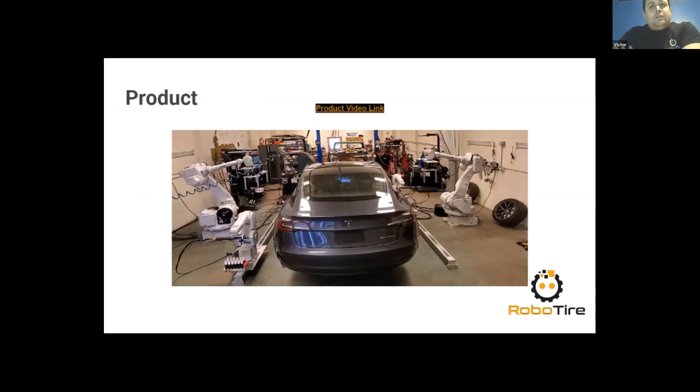So jump right into it. This is a video of our robots in action at our garage. You can mute it, you don't have to hear the full marketing sound.

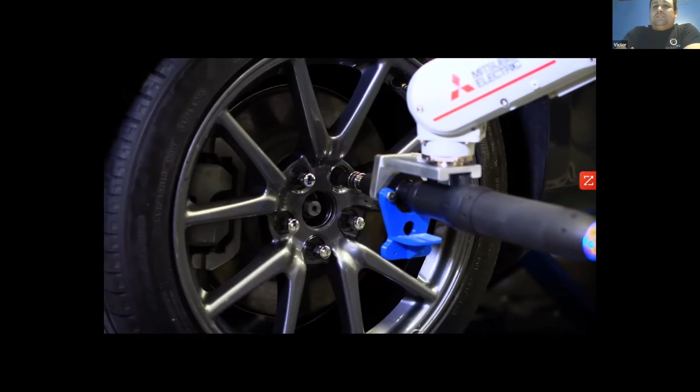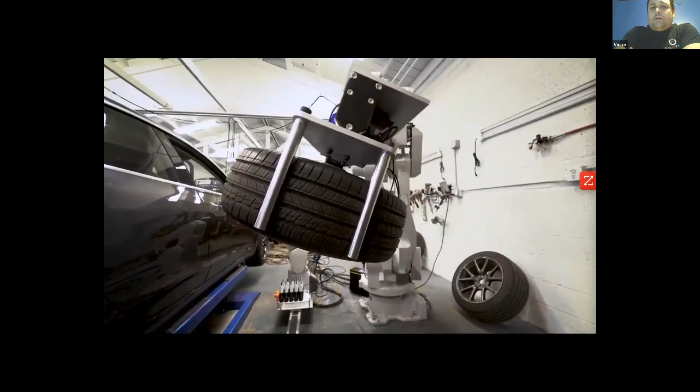So that's why we brought out this RoboTire system. What you'll see here is a completely automated bay. We have our own automated lift that will pick up the car.

We have 2 little robots that are responsible for removing lug nuts. We use computer vision to identify and detect where the lug nuts are. We're monitoring torque, breakaway, and run-up torque to detect cross-threading, prevent cross-threading, and prevent seized lug nuts, et cetera.

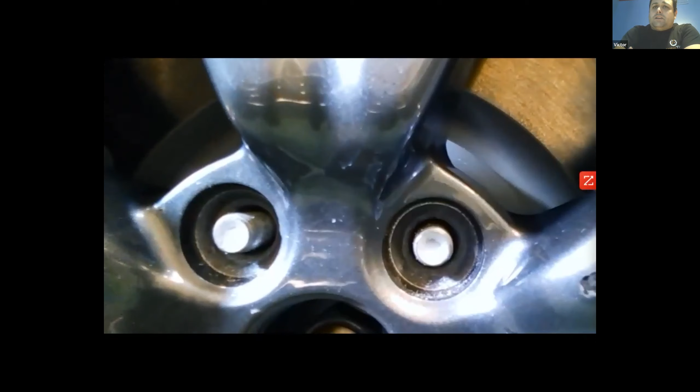And then our larger robots come in, and again, with computer vision, detect where that wheel is, ensure we get no stud damage, and it comes off.

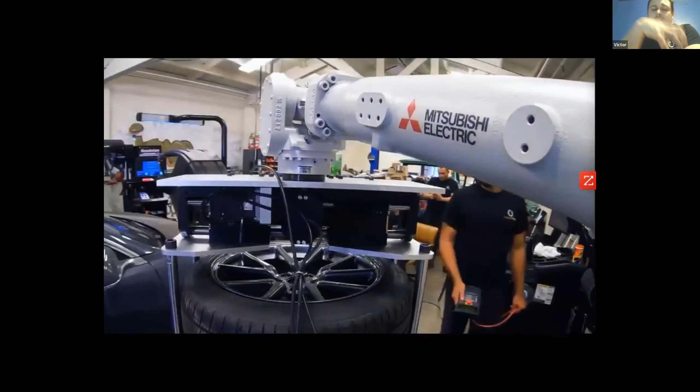And then in the next video you'll see in a second is our integration with Hunter Engineering. The tire changer actually demounts the tire and balances it. And then we bring it back on and put it back on the vehicle.

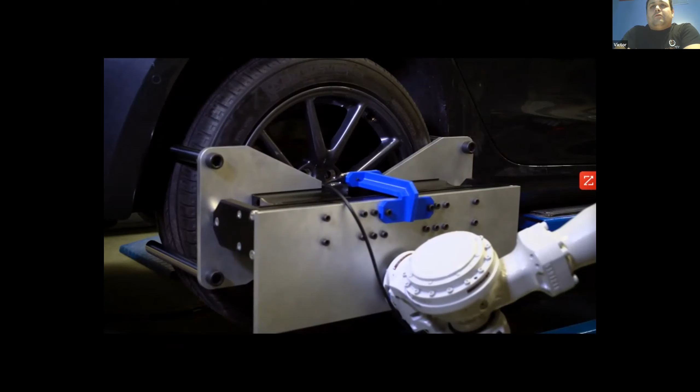All of these robots are unique from an automation perspective because they're all cloud computing. They're not single siloed, we pull from predetermined databases. We all pull from vehicle OEM information, so that's how we get torque values, wheelbase, stud lengths, et cetera.

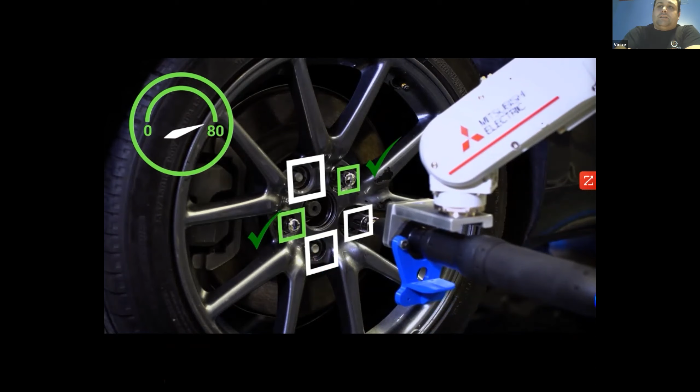And this should be wrapping up in a second, and we'll jump into the next video. So this video is really interesting because Hunter is the biggest player in this space. And what we do is we have an industry first where our robots actually control their systems.

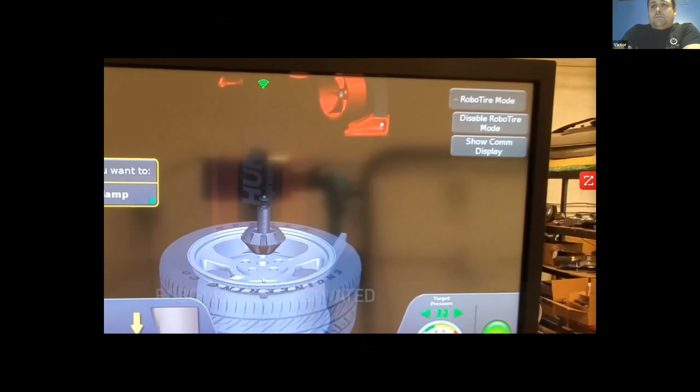So for people who are familiar with Hunter, what you'll see is that our robots have an open API. We can actually work with any tire changer and balancer, but you'll see here where we go into our own RoboTire mode, and it's completely autonomous now, lowering spindle, putting new tire on, new tire prep, et cetera.

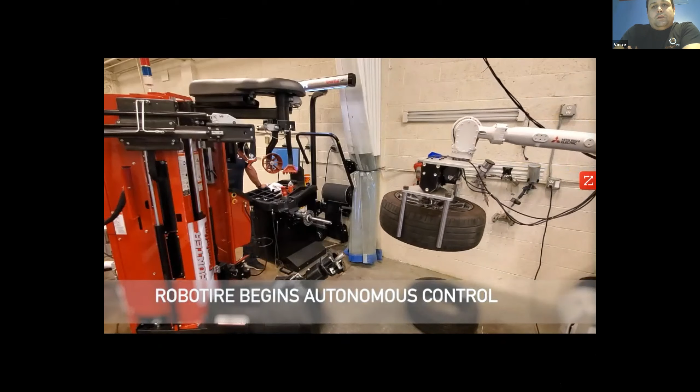So you see here, we dropped the spindle. This is some of our earlier versions where we did have a little bit of human operation. The human is still used for deflating and inflating.

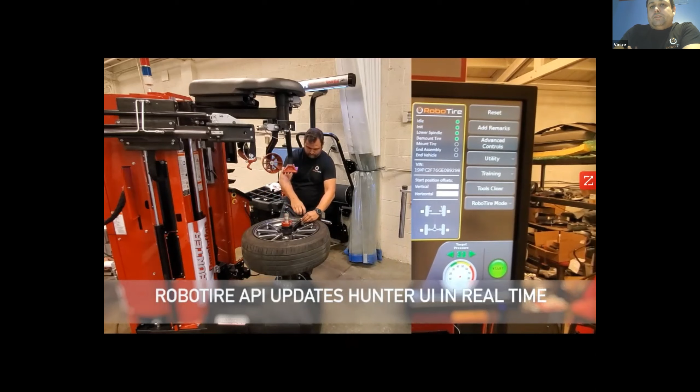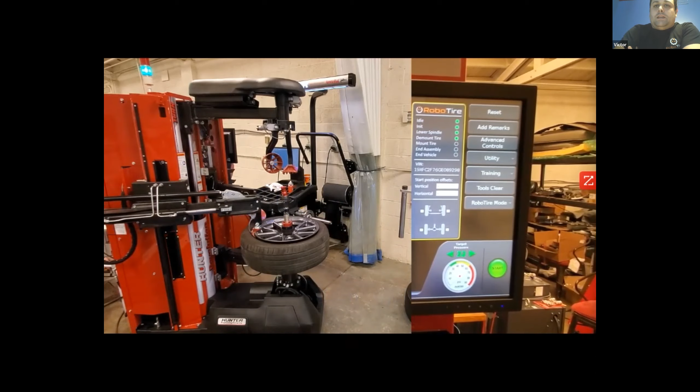I can go into the tire process later, but to not bore you, I won't jump into it fully. And again, these systems are completely autonomous.

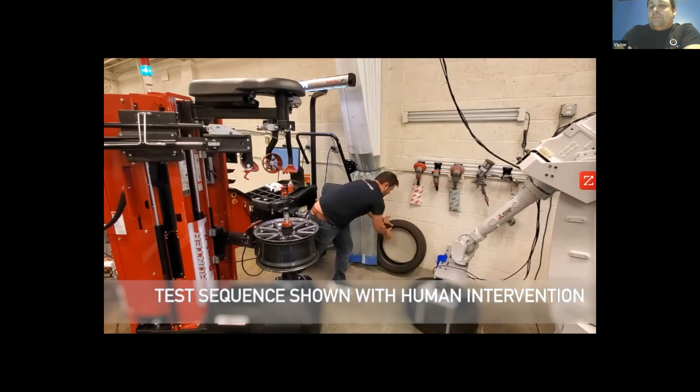While this goes, I always like to ask - and no one's going to respond right now - what everyone thinks the tire market is. Most people are off by a factor of 10. It's $40 billion that we spend on new tires alone each year.

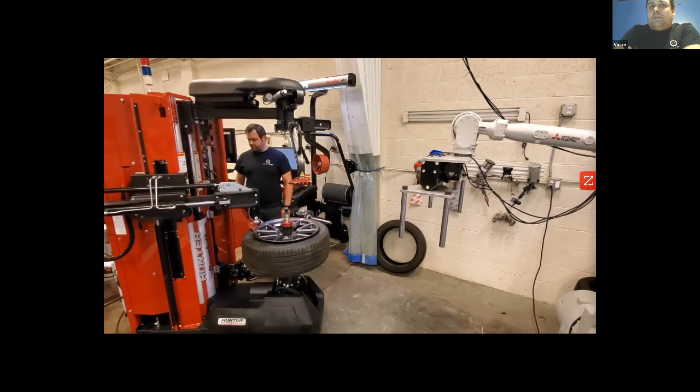And that market is getting better. I'll address why it's getting better in a few seconds.

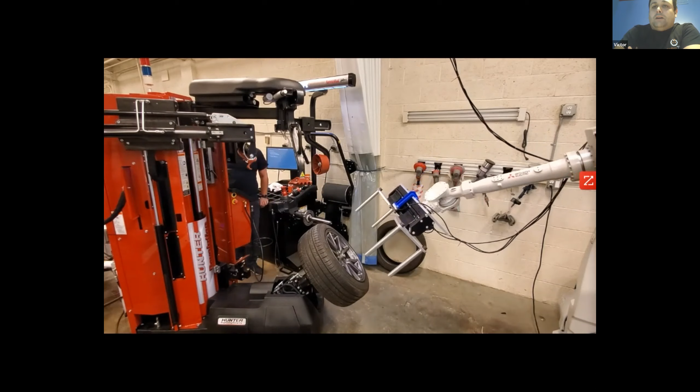So you're just finishing up here of inflating the tire, and then it'll go over to the balancer. You can stop the video there, in lieu of moving forward.

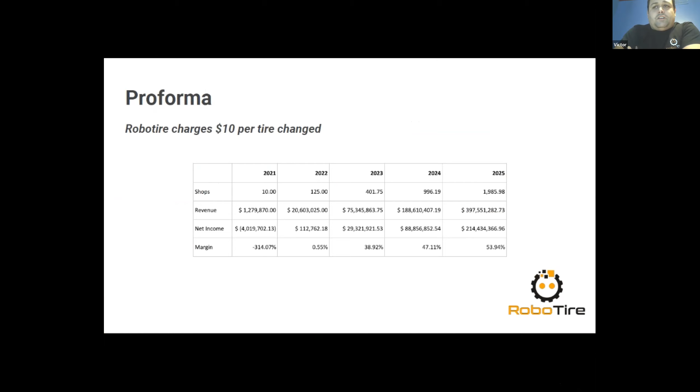Next slide please - that's just our financial projections. We grow very quickly. You can jump over this one.

Again, like I said, we do a rev share, so we charge $10 per tire. And like I said, this industry is getting better. So go back one slide, please.

Electric vehicles actually burn through tires faster because of the weight and torque. And then with the increase in fleet demand, we're driving more miles. What I'll show you at the very end is what we've deemed the gas station of tomorrow.

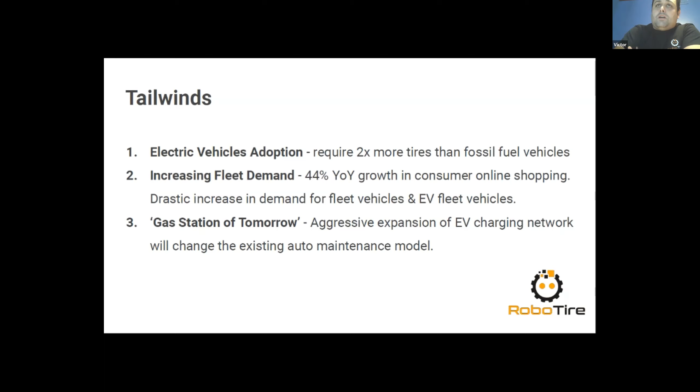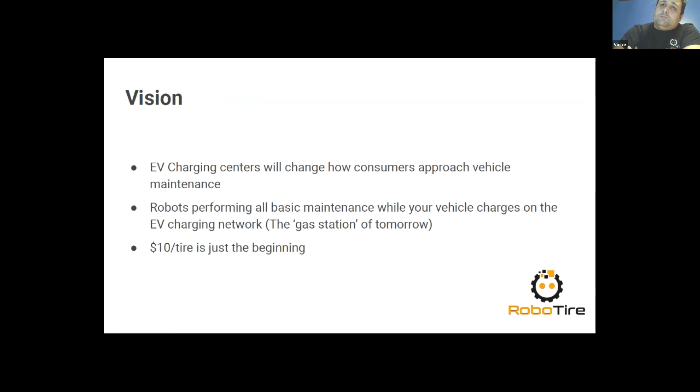Oh, one back, sorry.